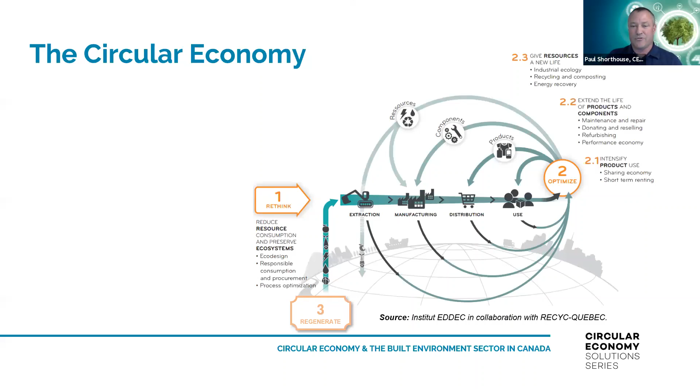Rethink the way we are doing things to design out waste and pollution through upstream interventions. It looks to optimize our materials and resources by keeping our products and assets in use at the highest value possible throughout their lifetimes. And thirdly, it looks to regenerate our natural systems.

The circular economy is interesting because it also allows us to go deeper on our climate and greenhouse gas emission targets, seeking reductions by moving beyond our focus on energy use to consider manufacturing processes and supply chain emissions, things like embodied carbon, as well as our non-energy emissions like land use impacts.

Fundamentally, circular economy is about designing out the concept of waste altogether from our products and services. When you think about that from a circular economy perspective, we can think about waste in four different forms.

First, wasted resources, where we have or are using materials and energy that cannot be continuously regenerated. Secondly, wasted assets, where products and assets sit underutilized - for example, buildings that sit empty for too much of their lives.

Wasted life cycles, where we have the premature end of use of products, given the lack of repair or maintenance, reuse, or adaptability. And lastly, wasted embedded value, where materials and components or energy from products and materials are not recovered at the end of their use through, say, deconstruction or material recovery processes.

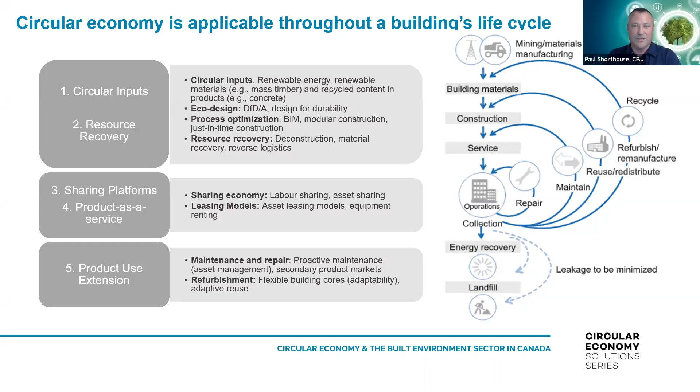Construction is a really important sector economically for Canada, but similar to the global picture, it's also one of the most wasteful. In Canada, about 3.4 million tons of construction materials are sent to landfill every year, about 1.8 million tons worth of embodied carbon. A recent report from the National Zero Waste Council found that about 1.3 million tons of embodied carbon could actually be avoided every year if all buildings renovated or demolished in Canada were disassembled and reused. So a big carbon connection there.

The market potential for circular economy solutions in Canada is large, and the awareness and interest is starting to grow. It's fair to say this isn't totally new—we've been doing this to some degree at different levels for some time. Even back in 1995, the Canadian Standards Association developed standards and guidelines over the last couple of decades, some extremely relevant to circular economy practices in Canada's built environment sector, like design for disassembly and adaptability, design for durability, design for deconstruction—existing standards here today. There's also many relevant examples of circular business and construction initiatives in action, with efforts by industry, governments and other stakeholders leading to greater material circulation and lowering greenhouse gas emissions.

That being said, over the last decades, it's fair to say the efforts have largely focused on the waste diversion side of things, and to some degree resource recovery, but much less has been focused on the more upstream circular strategies, such as circular inputs and product as a service business strategies.

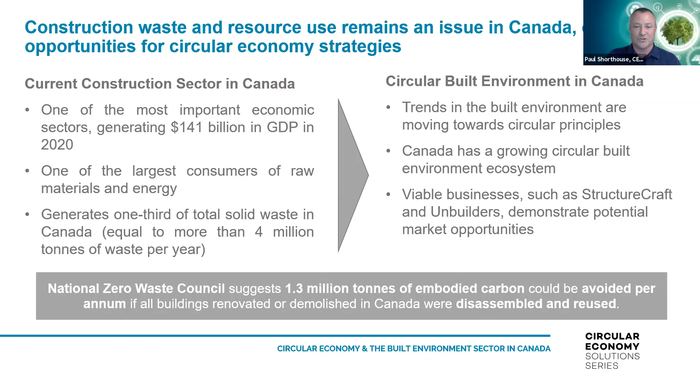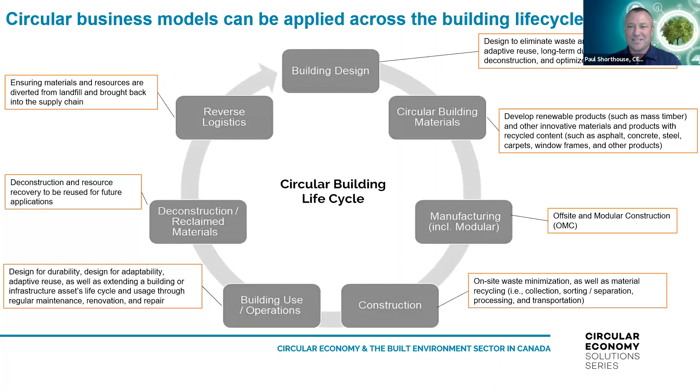So looking to explore some of that today. The discussion paper profiled the current state of circular built environment across Canada, including showcasing a number of leaders and project examples, following a framework based on a circular building's life cycle. It starts at the design stage—circular design—then product and material innovation and manufacturing, including offsite and modular construction, then construction site best practices, then building use and operations, including long-term maintenance and repair and adaptive reuse, and finally deconstruction and resource recovery with reverse logistics, looking to get materials back into the supply chain.

It's also really important to acknowledge there are many additional actors that support the circular built environment transition in Canada, like governments and regulators at all levels, education and training institutions, research agencies, academic think tanks, the role of industry associations and other nonprofits, and standards bodies—referred to in the report as the enabling ecosystem.

Many industry leaders are focusing on design challenges and working to embed circular building practices and strategies. But given the fragmented nature of our construction sector, we're seeing significant system barriers and existing inertia that has to be overcome. Barriers include cost challenges in the transition from the current status quo, a broad lack of awareness or understanding about what circular economy is and what the business opportunities are, and challenges with the industry and ecosystem's fragmentation and silos across the value chain, which create barriers for collaboration or the systems approach required.

The construction supply chain is very complex, and there are many infrastructure gaps, which also create structural barriers to the changes we need. For example, the market for recycled materials can be very regional, creating challenges for cross-border material flow. And lastly, inconsistent policy and regulatory frameworks between jurisdictions create challenges and investment risks in that space.

Key enablers look to tackle these barriers—from embracing circular design at the outset, to more education and awareness of business strategies and opportunities, to cross-sector collaboration in line with systems thinking, technology and business model innovation, the support of policies and regulation, as well as procurement that can help drive demand for circular products and services. There's a lot more detail on all of this within the discussion paper, and we're going to really dig into some of these issues and opportunities throughout the rest of today's workshop, including hearing more from today's presenters.

So without further ado or delay, I'd like to go a little bit deeper together on the key topics for today's workshop as I introduce our expert speakers.

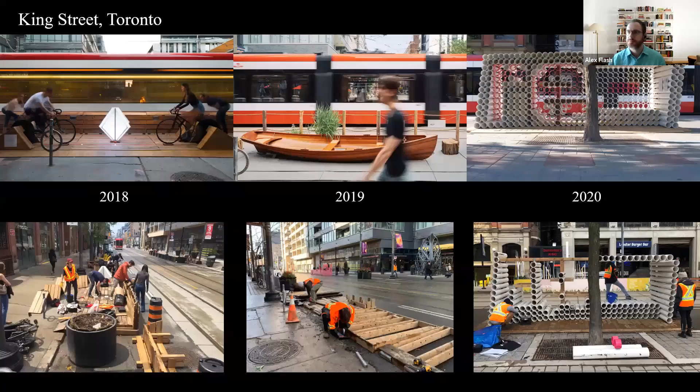Since 2018, I've been very lucky to work with the City of Toronto on their annual temporary parklets, which some of you may recognize. Albeit on a modest scale, it was the need for these to be built off-site and uninstalled each year that has given me a very hands-on opportunity to develop my circular design awareness and thinking.

By designing a modular base, we were able to fully reuse the timber from year to year. By reaching out to individuals and local organizations early on, we were able to reduce to a minimum the virgin material used at the outset, as well as the amount of material going to landfill at the end of life.

Scaling up to a more complex and typical building project, the layers diagram, first developed by Stewart Brand, is a useful way to approach design. Buildings should be designed in separate but interlinking layers, as they each have different lifespans, making it easier to maintain, upgrade, or replace them independently.

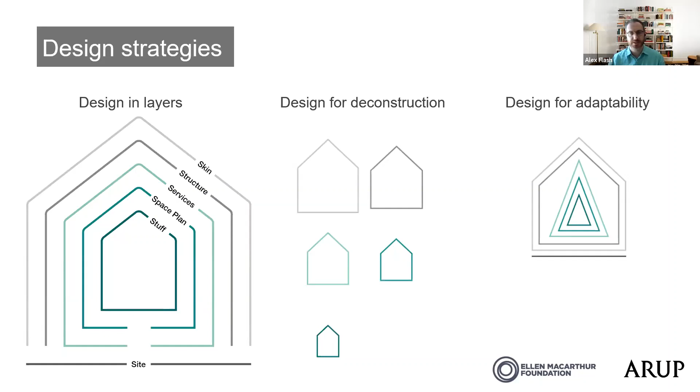Designing for deconstruction means that if the building isn't required anymore, it can be dismantled rather than demolished, with materials and components extracted for reuse at their highest possible value. Designing for flexibility and adaptability means, for example, thinking about the floor-to-floor height, the floor plate depth, column locations, core configurations, riser and plant room sizing and positioning, so that the building can accommodate multiple capacities and uses.

Another important layer for circularity is the overarching digital layer that allows for more efficient design, construction, and operation of a building. An early project that allowed us to test a lot of these ideas was the circular building for the London Design Festival in 2016. By working closely with suppliers and together with BAMB, Buildings as Material Banks, the project achieved its aims of putting its constituent elements back into circulation at end of life and creating a zero waste building. All materials were tagged with QR codes, allowing for easy identification, sorting, and tracking.

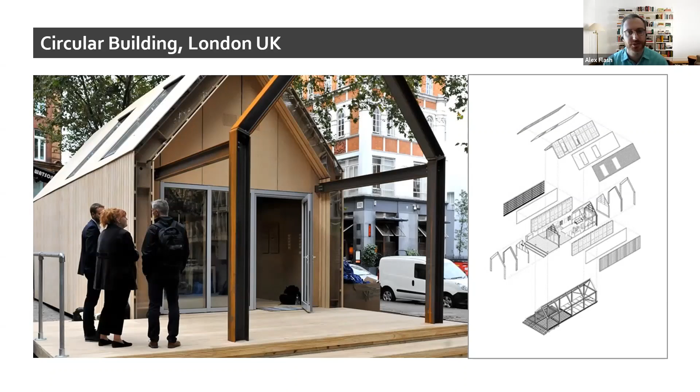One of the main takeaways from this early experiment was the degree to which the manufacturers of long lead and longer design life items, such as structural steel, were not yet ready for leasing models.

In the digital age, any material that might be usable but is not tagged and trackable is waste. BIM softwares now allow designers to attach a vast amount of metadata to building elements that can be embedded into material passports. These provide a log of each component in a building, informing how they can be repurposed, and they are one of the keys to circulating value through the economy.

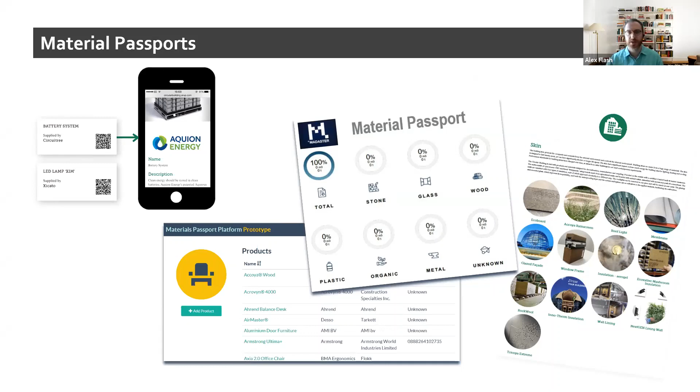In the EU, organizations like BAM and Madaster are coordinating material asset banks and libraries across regions, and are a great example of the open-minded collaboration needed for solutions at scale.

Another temporary project that allowed us to push the envelope even further was the 2017 People's Pavilion for the Dutch Design Week in Eindhoven. Working closely with architects Bureau SLA and Overtraders, Arup provided structural design for this iconic project.

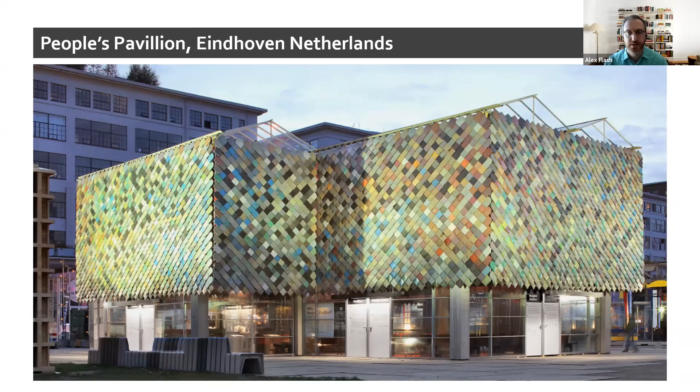The facade consisted of over 9,000 interlocking plastic shingles, recycled from PET bottles donated by local residents. The glass roof was borrowed from a greenhouse supplier, while the glass lower facade was saved from a demolished office building. The lighting, heating, furniture, and other interior elements were also borrowed.

Designed with easily reversible connections, the pavilion was formed from standard wooden beams, strapped together with steel strips normally used to bind pallets. The 7-meter tall columns were made of prefab concrete foundation piles, with steel rods from a demolished office building being reused for the cross bracing.

The structural frame was tied together using high-capacity ratchet straps to create a safe structure capable of withstanding strong winds. To test and validate this unconventional system, several experiments were carried out during the design stage in cooperation with the Technical University of Eindhoven.

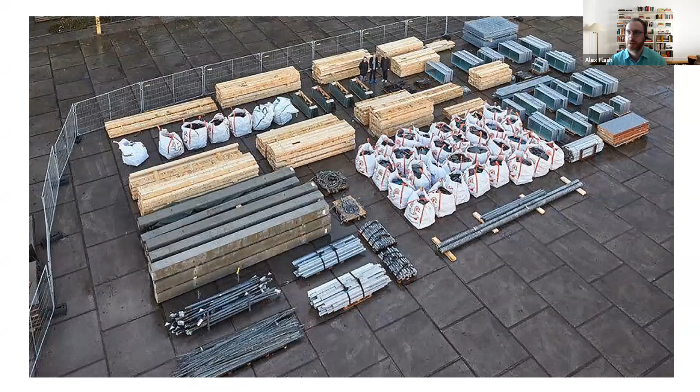All borrowed materials used in the construction were returned once the pavilion had been dismantled. Many items were reused in further construction projects, achieving another key circular economy principle of ensuring that materials are kept in use at their highest possible value.

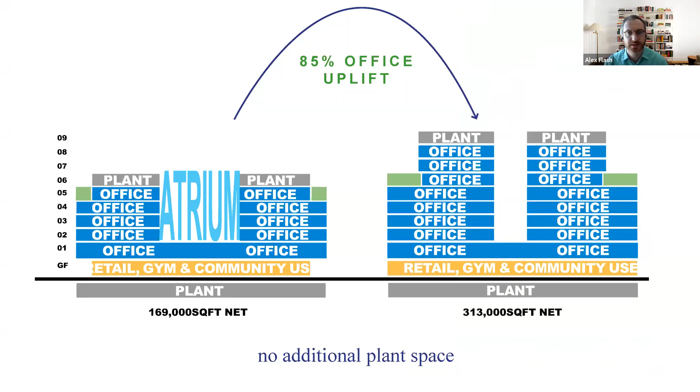And now to a remarkable project in London that is currently nearing completion, 1 Triton Square. A circular design approach and strong collaboration with stakeholders and suppliers enabled this refurbishment in London's West End to achieve a doubling of office floor space with no additional plant space.

The project achieved BREEAM Outstanding, and some of the metrics and strategies that helped achieve this were a 54% reduction in embodied carbon compared to an equivalent new build, and 100% waste diversion during soft strip and demolition. In total, 40,000 tons of carbon were saved, which is more than the operational budget needed to run the building for 40 years.

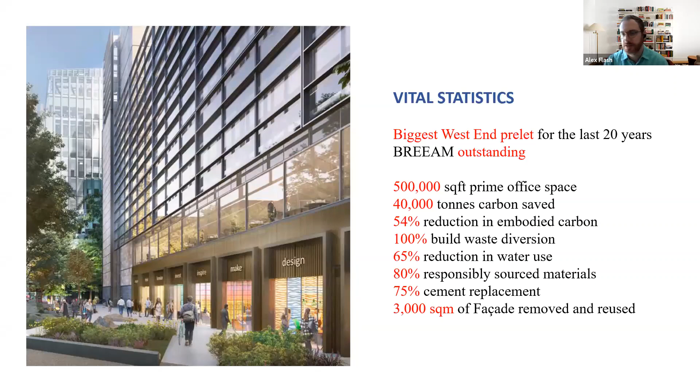Through a plethora of marginal gains across all disciplines and life cycle assessment of all major building components, significant environmental benefits were achieved and at little extra cost to the client.

A close collaboration with the demolition company allowed for the original air handling units on the roof to be taken to South Africa and given a new lease of life in another economy.

As for material reuse, original paving stones were reused on the new roof. And last but not least, 3,000 square meters of the facade were taken down and reused on the project.

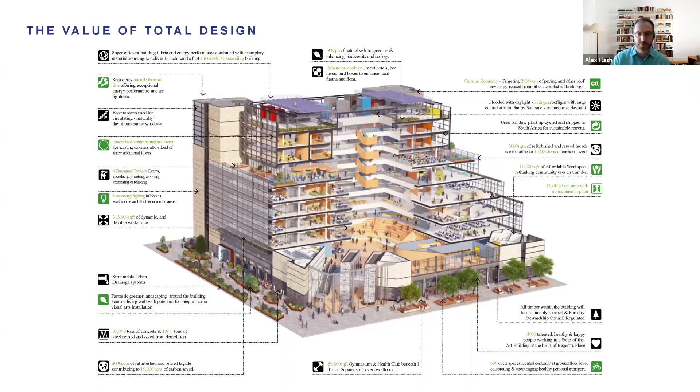To enable this, a temporary off-site facility was set up a short drive away from the site for the inspection, cleaning, and renewal of each of the facade panels.

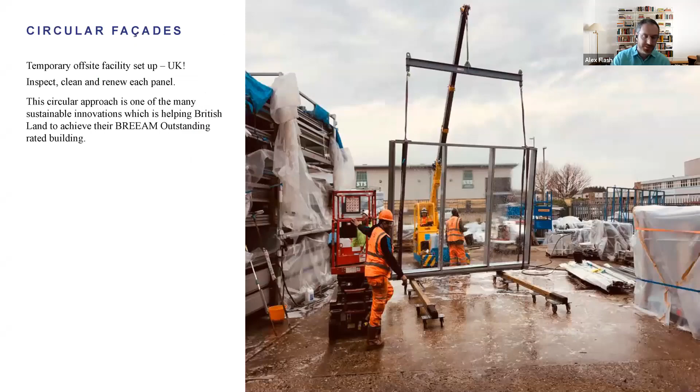Projects like Triton challenge the status quo of conventional refurbishments and provide hope that it is already possible to start implementing circular solutions at scale.

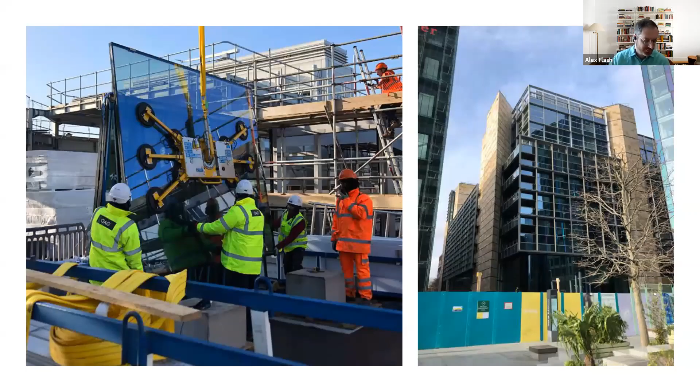Thank you all for your time today, and I look forward to discussing with you how we can advance the circular built environment in Canada.

Wonderful. Thank you, Alex, for that overview, and great to see some of the global projects that you've highlighted and how they've approached that. There's one question I'd like to bring forward before we jump to our next presentation, and that is a reference to a project in Toronto called Dufferin Waste that has a circular procurement mandate by the city. Are you familiar with that project, or anything you can share on that?

I am unfortunately not familiar with that project. Okay, no problem. We can send you that question afterwards, and we can always include that in the report back that we're going to share with everybody afterwards, include a feature on that.

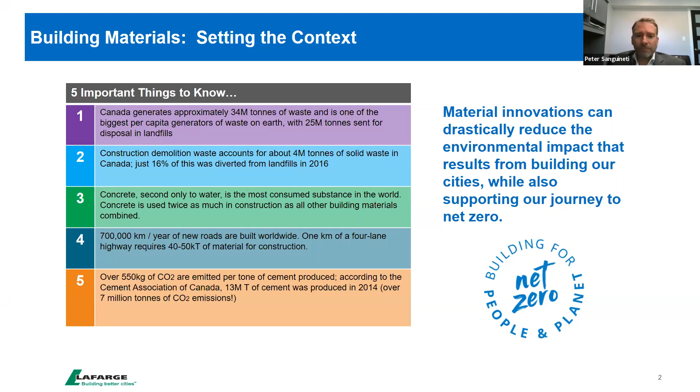To understand how we can do this, I wanted to highlight the key stages of the typical construction cycle and zoom into some common elements. Fuel is part of all of these stages, regardless if we're extracting aggregates, bitumen, harvesting wood, or moving it by truck, vessel, or rail to make cement, asphalt, or plywood. Fuel is powering all our equipment and transportation.

We are all familiar with electrification and hybrid technologies, and we're huge proponents of these as a significant opportunity. But I also want to highlight our attention on the use of waste as a non-traditional fuel. For example, in Europe currently, about 50% of the thermal energy used to power cement kilns is coming from recovered bottles from landfills and our oceans. We estimate that within the next 5 to 8 years, this percentage can be increased up to about 80%.

Transportation is also present in all of these phases. One liter of diesel produces about 2.7 kilograms of CO2 emissions. So at least from an environmental perspective, having our extraction and manufacturing sites close to market does make sense.

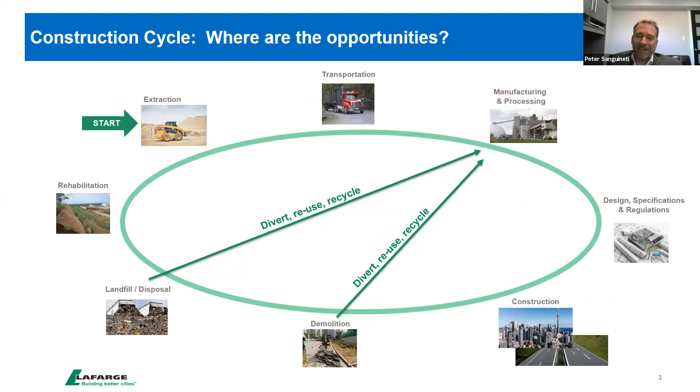To zoom in on some key opportunities, I mentioned the use of alternative fuels for cement. I also want to highlight carbon capture technologies. While this is a fairly new technology, there are multiple types. In general, it uses hydrated cement as a feedstock, for example recycled concrete aggregates. This feedstock is exposed to CO2 emissions from an industrial process, for example cement manufacturing. In doing so, up to 70% of the CO2 emitted in the original manufacturing process of the feedstock can be reabsorbed. Through this carbonation process, which we call upcycling, the properties of the recycled aggregates are enhanced, so we can actually use it in higher value applications.

Concrete is also evolving to accept greener raw materials. For example, glass is being used to substitute sand, and ground calcium carbonate is being used to substitute a portion of the cement.

I want to highlight that I still feel political will, standards and regulations are one of the lowest hanging fruits that can have the most impact. When we are building 700,000 kilometers of road every year with minimum use of recycled materials, this is really a huge opportunity for us to do better.

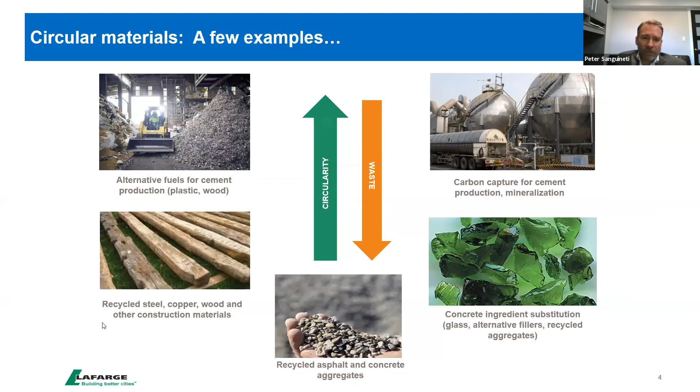So finishing just with summarizing these stages and what we feel are the catalysts. In 7 minutes we're barely scratching the surface, but really what we wanted to do was trigger this discussion so that when the World Circular Economy Forum comes in the fall, we can come to the table with clear actions, initiatives, opportunities to really evolve the way we do business in a more sustainable and effective manner.

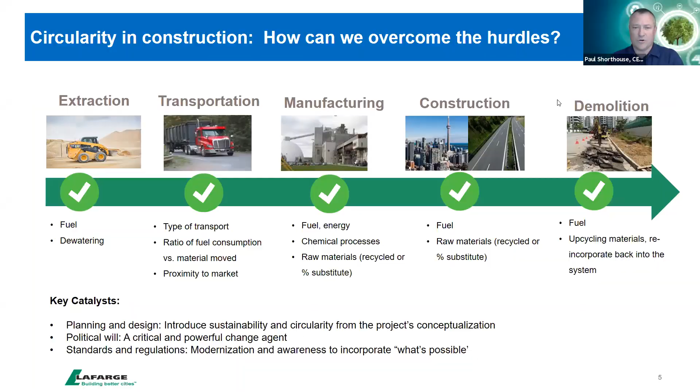I have one question, not from the chat box. There wasn't anything super specific based on your presentation, but I found it interesting. You made the point that some local governments are not allowing recycled materials for road construction, for example. What's the reasoning for that? Is there a perception around risk or quality?

I think there are multiple things to consider. The industry is partly responsible because in the past some actors were not producing in a consistent manner, focusing on quality, and there has been a confidence issue. Now the industry has evolved, and I think there are clear ways to certify that our products are going to perform. The other element is that the business has evolved quickly, and not all municipalities have the resources to adapt their regulations and standards to reflect those advances. So I think those are probably the two main reasons, Paul.

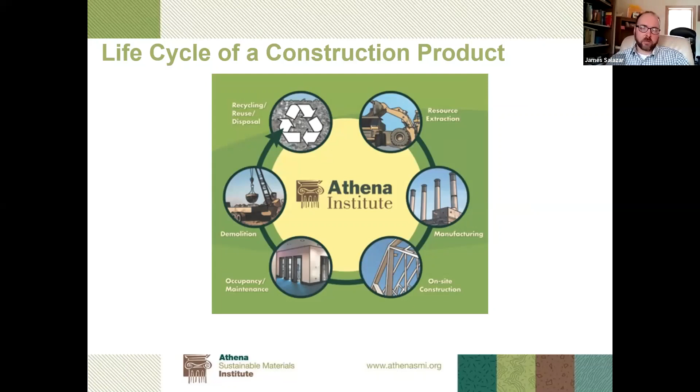What we've seen in the last 5-10 years is kind of a flattening of LCA into more of a linear approach, wanting to splice portions of the life cycle into nice clean buckets. Those familiar with the LCA and EPD world these days will recognize this common framework where you start with the product stage, A1, A2, A3, moving through construction and use and end of life.

It's also important to note that current LCA standards for building and product LCA include what's called Module D. This is really important to the circular economy because this is actually where the benefits of recovering these materials comes to bear. It's important to note that in the LCA world, it's deemed outside the system boundary, but it's a result you'll see for materials that are recyclable and have energy recovery and things like that associated with them.

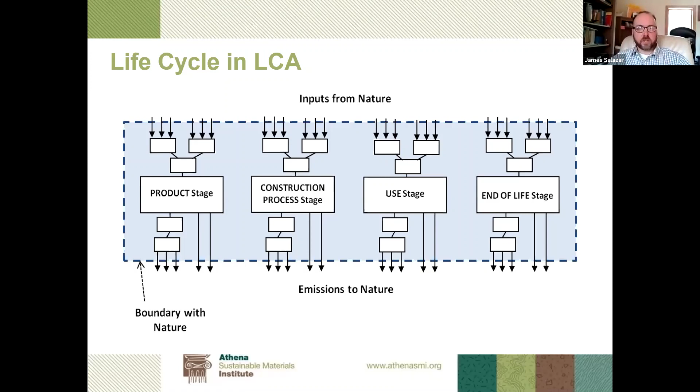Practically speaking, to do an LCA, we're talking about summing all of the inputs that come from nature across all of the life cycle of the building, then following those materials and energy flows to their eventual fate back to nature. This is direct emissions to air, land, water, looking upstream and downstream to the resource extraction in the initial stages to what happens to the material at end of life. When we do that, we end up with a nice set of potential impact category indicators.

I think it's important to note that circular economy is really adept at conserving what we call foreground resources, making sure that you're preserving the highest value for materials as they flow through their life cycle, and designing to do that and implementing recovery strategies, which I'm really excited to hear some of the other speakers talk about. But what LCA really comes to play into this is to appropriately consider those resource savings and the implications of that against these other impacts.

Every action has a trade-off. I really appreciated Peter mentioning that there's this movement to recycle more concrete, and it's really a win-win in that situation because you've got this high mass material that has this recovery value close to urban centers. We do find that quite a bit with recovered recycled materials, that it's a clear win-win situation.

But I think where LCA can come in and help inform this is when it's not so clear—potentially if you've got something that's recycled versus something that is closer or has other implications. There's recovery, energy processes, recycling processing, weighing that appropriately and considering all these trade-offs so you're not blind to externalities, things that aren't part of the system you're looking at. I think LCA does a great job at that.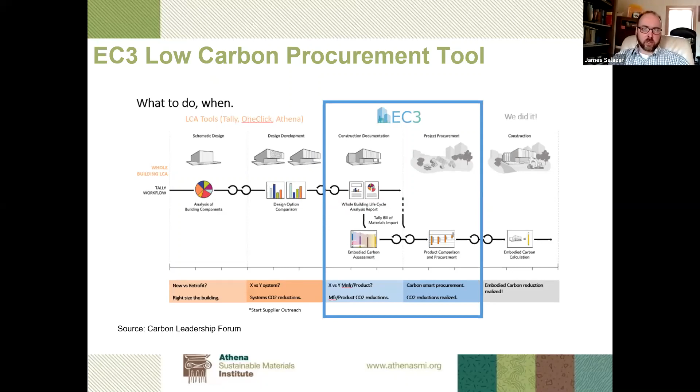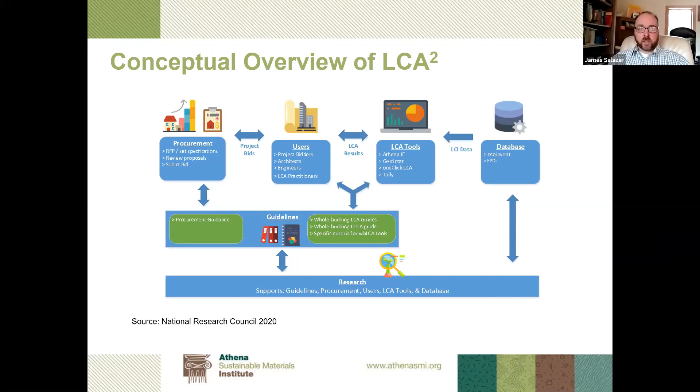You're also seeing in Canada, the National Research Council has a significant movement afoot on low carbon assets, incorporating LCA and EPD into procurement, really trying to develop LCA data and bridge the gap to smooth the ability to incorporate LCA into decision making. That initiative is really exciting too, because we're seeing very shortly whole building LCA guidelines and standards coming out of that working group.

So that's a lot to cover. Hopefully I got it in reasonably seven minutes. I'm really looking forward to some of the breakout sessions and getting further into these topics.

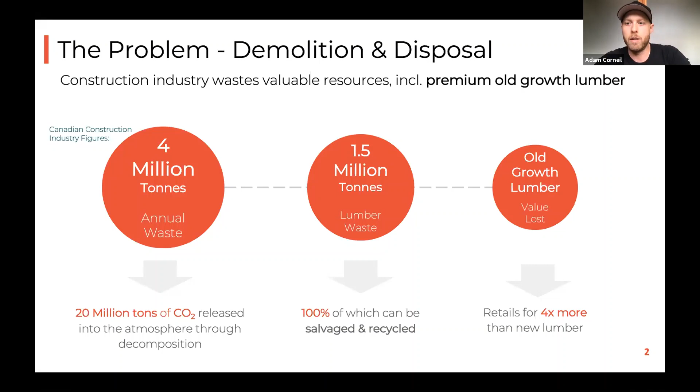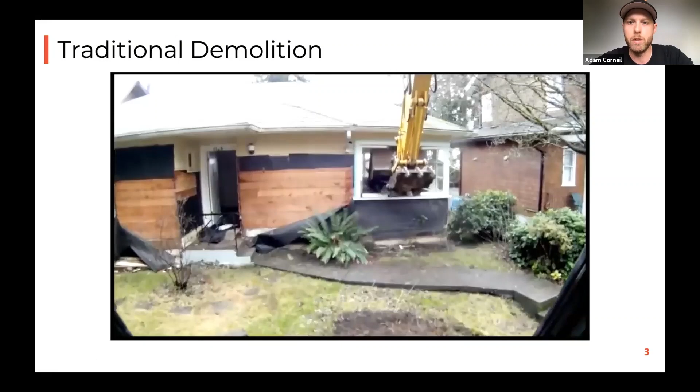So, the classic view of demolition, which is the typical linear economy: we build our buildings, they either come to the end of their life or someone doesn't like the design, and let's tear it down, throw it out and start again. Clearly just a massive waste of resources.

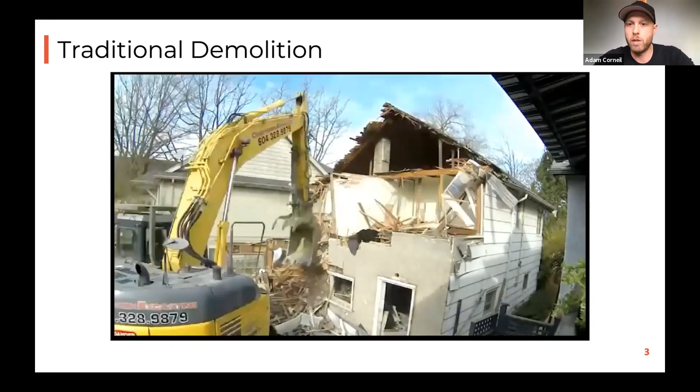The solution that we have, which other companies are also operating this way primarily in the US, is the circular solution to the issue, which is deconstruction, trying to maximize salvage and reuse and minimize waste in the end. So on one side we have Unbuilders, which provides the service, and then we have Heritage Lumber, which is the lumber brokerage that sells the materials.

We get keys to a new facility on Monday in Vancouver to start remanufacturing and opening up to the public, just to generate more sales and have a bigger publicly facing facility.

We have a great partnership with Habitat for Humanity, as well as the Reuse People, two different charities, but Habitat's our main recipient of goods. This gives the added benefit of a tax receipt for owners when we do a deconstruction under a donation model. We're trying to provide financial incentives for clients because unfortunately deconstruction costs more.

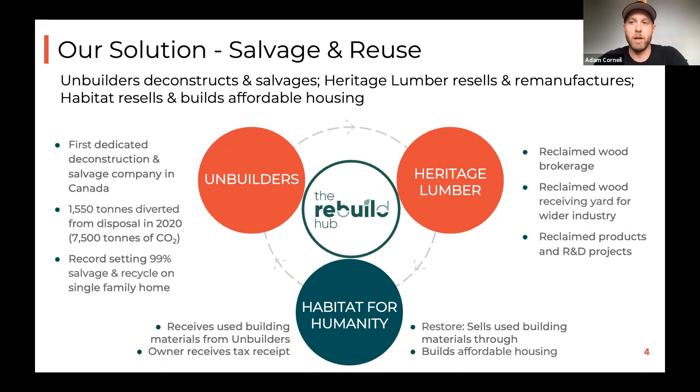So we're trying to make it so there's financial incentive to do this, because not a lot of people are going to do it just because it's the right thing to do or the environmental thing to do, unless there's policy that pushes them in that direction.

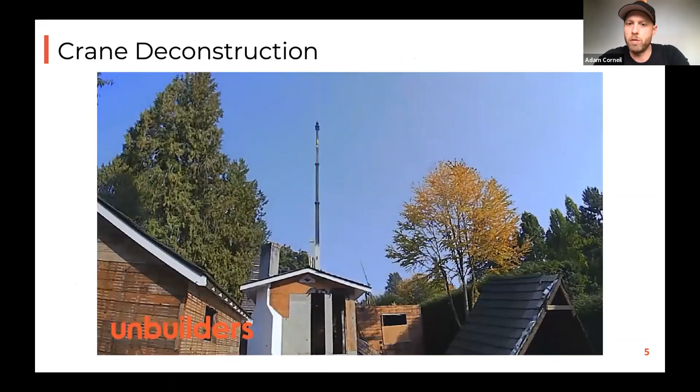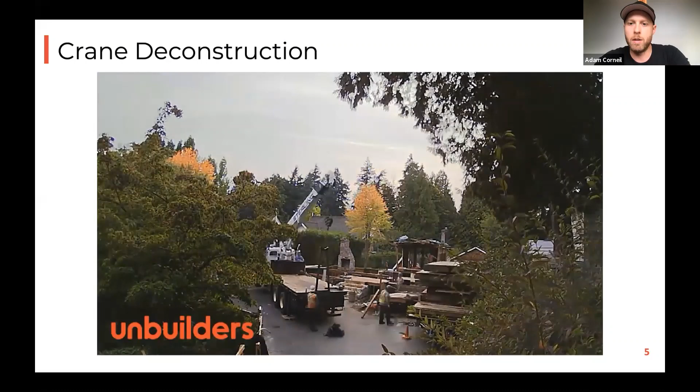Looking at what a deconstruction looks like, this is a crane deconstruction of a house that we did. We're also trying to evolve the service faster and faster every day to compete directly with demolition, because the two main hurdles to transition to this circular solution are time and cost. We're combating both with our unique business models and the efficiency and experience we've gained over the last 6 years doing this.

Tapping into what the material is that we're recovering - this topic is really top of mind, I think, for a lot of British Columbians with the amount of protests going on right now at Fairy Creek and the old growth logging that's occurring.

The material we're recovering from every building pre-1970 is old growth lumber. So even down to the 2x4s and the roof strapping that we're taking, this came from big old ancient trees. And this is not just a raw material that needs to be viewed in that way.

This is a piece of our history. It's part of the heritage of the land that was stewarded by the First Nations before Canada was a country. And every demolition that we allow to occur, this material becomes more and more scarce. It's only found locked behind the walls of our buildings. We need to treat it with extra care, and this is added fuel for why we need to start deconstructing all of our buildings, at least pre-1970, immediately.

The benefits of old growth lumber: it's 3 times stronger than modern lumber, and reclaimed wood in general has 12 times less embodied carbon than virgin lumber, and lumber's already got less embodied carbon than concrete and steel. So reclaimed wood is literally the greenest building material on the market that you could build your buildings or finishes with. If you want to be sustainable, I highly recommend you transition from wood products to reclaimed wood products.

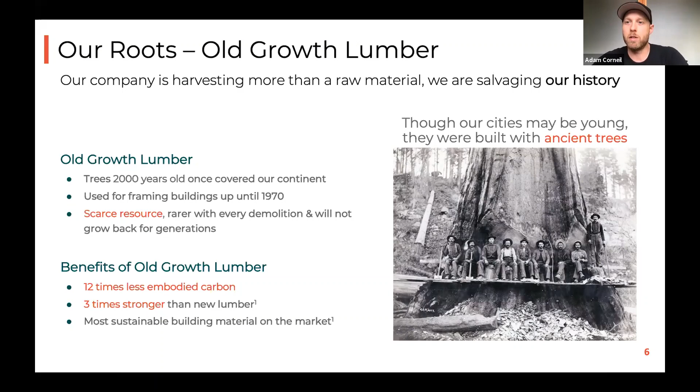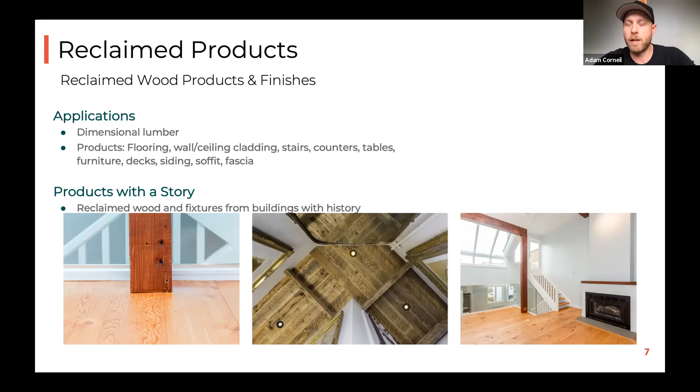There's a lot you can do with the wood. Basically anywhere that you're installing wood product, whether it's flooring, cladding, posts and beams, furniture, countertops, whatever it is, it can be reclaimed wood. It can get finished, it can get processed in a manner to fit any design aesthetic. It doesn't just have to be the rustic classic look we're used to. We do a lot of projects where it ends up in a really modern setting, and you can't even tell it's reclaimed wood. But it still has that added benefit and that added story and history to it.

Tapping into the benefits of deconstruction - I've already touched on the environmental ones, aside from the fact that our landfills are overflowing. So if we continue to work in this linear economy, we're going to have to either expand our landfills and take highly valuable land. For instance, around Vancouver, you're looking at up to $12 million per acre, and these facilities are several acres, tens of acres, to have a proper landfill.

So the solution is to curb the waste. This is where I also think policy needs to come into place, or incentives need to come into place, because it costs a lot less to incentivize people to deconstruct than it does to create more landfills.

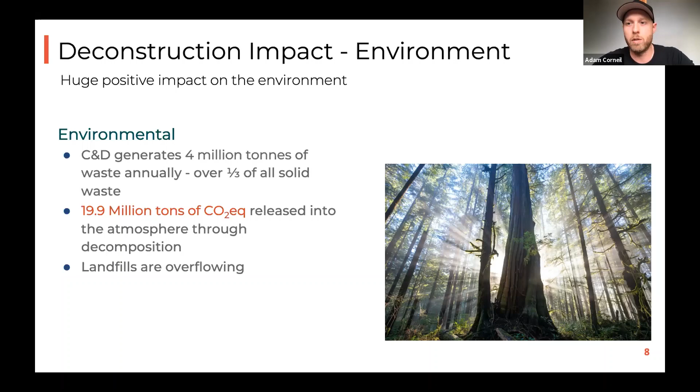On the social impact side, our partnership with Habitat for Humanity means when you choose to deconstruct or unbuild with Unbuilders, some of the proceeds go to Habitat for Humanity through their sales of the materials, which means you're contributing to the construction of affordable housing as well.

We get a lot of flack when people see policy changes, saying you're increasing the cost of real estate and making it less affordable by mandating deconstruction. I have a hard time believing that—it actually directly fuels the construction of affordable housing.

On top of that, there's an added health benefit, which is the dirty secret of the abatement industry. Every building that's demolished still has asbestos in it, contaminating our neighborhoods, communities, landfills, and recycling facilities. The only way to fully remove the hazardous materials is to deconstruct layer by layer and make sure they're all taken.

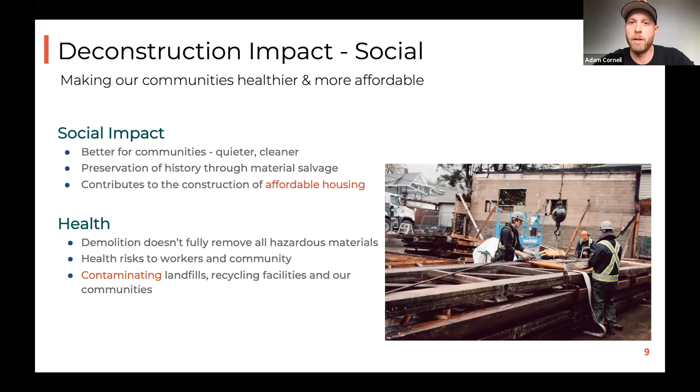I'm at my limit here—I've got two more slides.

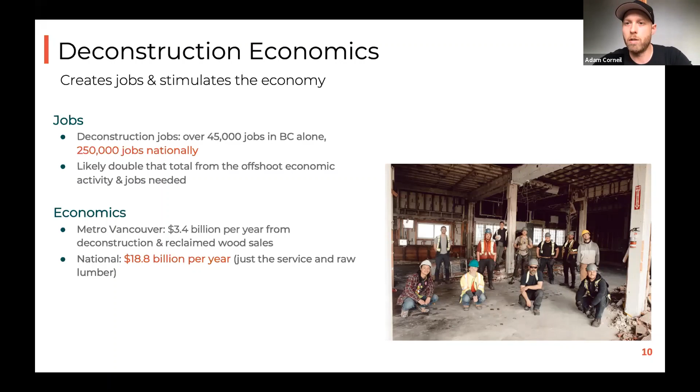And then just the economics—this is really for the policymakers. These are the feathers in your cap to start pushing this policy toward deconstruction, because it's a massive job creator and stimulates the economy in a big way. It does cost more than demolition, but there's also all the material sales and jobs it creates down the line, which is great for the economy. Our numbers are conservative, just looking at the service itself and reclaimed wood—that's 250,000 jobs nationally, $19 billion a year to the economy nationally. It's significantly higher in both categories when you consider all the offshoot activity.

And so really moving forward to create the circular economy, which is why we're all here today. The industry exists on a small level right now, but it would exist on a big level if policy supported it across the nation. We're seeing this already exists in Vancouver, and Victoria is transitioning that way as well. We really want to see this across the nation.

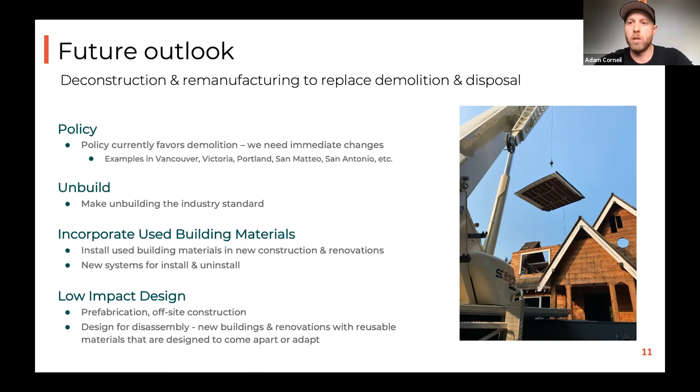For those developing properties, we really recommend you consider unbuilding instead of demolishing, and incorporate used building materials into your products and builds. And for all the designers out there, start thinking of that whole end-of-life cycle—design for disassembly, design for deconstruction—so that when a building is changed or adapted in the future, those materials don't have to go to the landfill. They can simply be put back into the supply chain. So it's not waste, it's just wasted. I think it's time we stop wasting these very valuable materials.

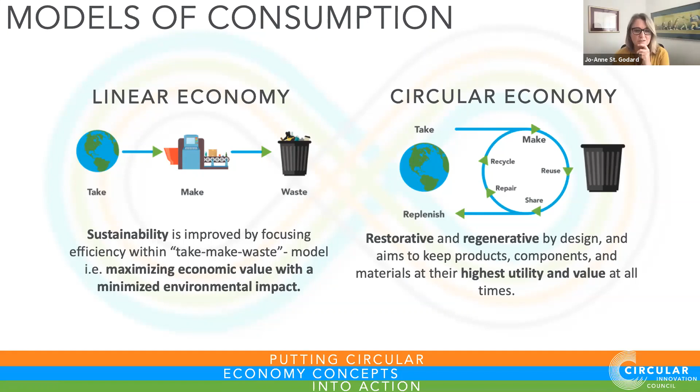But when we transition to circular procurement, we're actually looking at construction as a system. And we've heard almost in every presentation before me today talking about collaboration and planning and designing. So we know that as it relates to construction and deconstruction, to build circularity into the industry, we need to look at construction as a system, not as a process, which really mirrors the difference between sustainable and circular procurement.

So why procurement? Why is this something we want to talk about in this context? Because we don't have circular products or services if we don't have circular buyers. The supply will go where the demand takes us. So we have to fundamentally change the way that we demand, the way that we construct, and every aspect within construction if we hope to really transition to a circular economy in the built environment.

Why are we as an organization really focused on public procurement at the moment? Because governments are not often thought of as consumers or market shifters or changers. But when you think about public procurement, it represents 13% of our total nation's GDP and has a value of about $30 billion annually. And it has not only these direct influences as it relates to its spending on goods and services, it itself at a federal level owns 4,500 owned and operated facilities, so enormous buying power.

But it's also a stimulator of an economy, and we're going to be seeing that during the post-COVID recoveries. We're already seeing it globally in terms of incenting or stimulating a green economy. Our governments also fund one another, so municipalities and provincial governments receive funding from the feds, and that funding can certainly stimulate certain activities and accelerate our transition to a circular economy. And then, of course, training and employment opportunities that are part of the social benefits that come with transitioning to circularity as well. So huge and very impactful indirect and knockoff effects from focusing on public circular procurement.

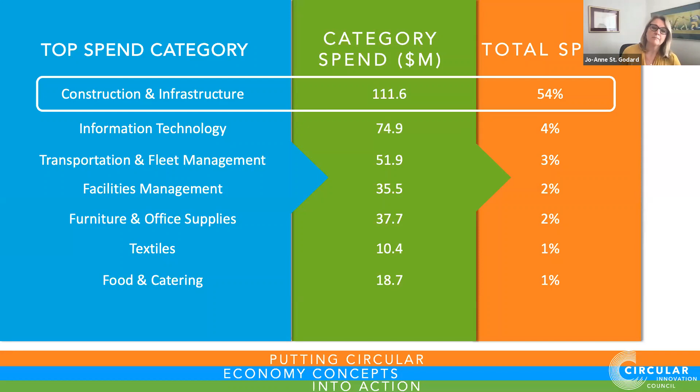So when we think about procurement and transitioning to circularity, we want organizations and buyers to think about tendering for performance versus tendering for specification. And that's where you're actually starting to require from your vendors, your suppliers, your constructors, the outcomes that you're trying to drive, whether they be carbon neutrality, low impact goods from local suppliers and services, driving zero waste, looking for local employment opportunities or local economic stimulus and training opportunities.

We want to look at these procurement opportunities in terms of how they satisfy these broader objectives and drive performance, as opposed to draft tendering and RFPs and RFIs that are specified to the types of goods or materials or designs that we want from our buildings. I talked a little bit about the triple pillar, or triple bottom line, as it's sometimes referred to.

We often don't think about how construction projects and our buying power can drive multiple different objectives. In the case of circularity, we think that to meet our economic needs and get the lowest bid, we have to concede the environmental and social benefits we'd also like to advance. But in fact, with circularity focused on an outcomes-based process, we can drive all three pillars at once. So it's really important to remember the broad scope and stay focused on those outcomes.